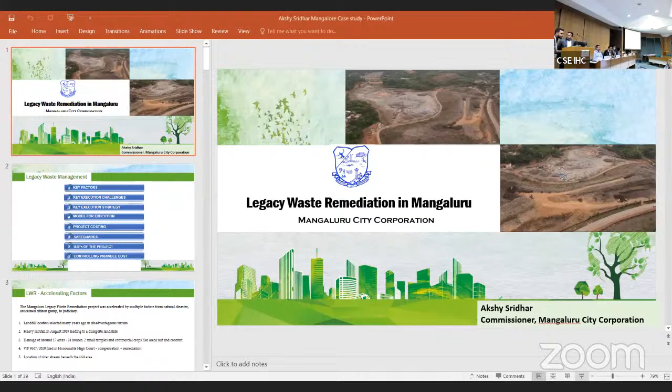Good afternoon to everyone gathered here and appearing virtually for this conference on dump site remediation and handling of legacy waste by Center for Science and Environment. I extend my sincere gratitude to CSE for inviting Mangalore City Corporation and giving me the opportunity to present Mangalore's case of handling this problem.

To give a brief introduction of Mangalore, especially in terms of terrain and weather, is pertinent before discussing the problem. Mangalore has a monsoon period ranging from 5 to 7 months a year, with a very slopey and hilly terrain. It's a place where the Western Ghats meet the Arabian Sea, so the city has hills on one side and sea on the other. There is an absolute scarcity of flat land; having flat land without undulations is only a dream for any Mangalorean.

The dump site or landfill location presently in Mangalore was selected probably 40-50 years ago. Over multiple years, this entire area of 25 acres was where waste was dumped. At the time of selection, the terrain put it in a disadvantageous location on a small hillock. As more waste kept coming, it kept moving inward, and one fine day in August 2019, the entire landfill collapsed, leading to submergence of 17 more acres, making the total landfill area 42 acres.

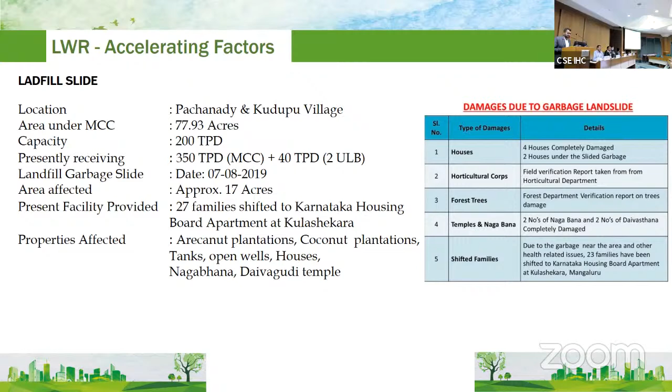So we were presented with this problem to handle all this legacy waste. Unfortunately, we did not have any model to rely upon, because wherever legacy waste had at least been partially cleared, the challenges were far lesser than what Mangalore was facing. With that as the backdrop, we had to factor in all of this and find a solution. One goal was to have a clean environment, and the main accelerating factor, I have to admit, was pressure mounting from the Honorable High Court and also NGT and other bodies.

Mangalore is also a very activist and active city, politically and socially. So we had to deal with that at the same time, and we needed a quick solution to handle this problem.

The entire terrain from the top of the landfill hill to the bottom was about 30 meters, with continuous undulation, and a river stream running just beneath it. Another problem was we did not have any spare land available inside the dump site area to set up infrastructure to bioremediate or process it. We had to find land inside this dump site only to handle this problem.

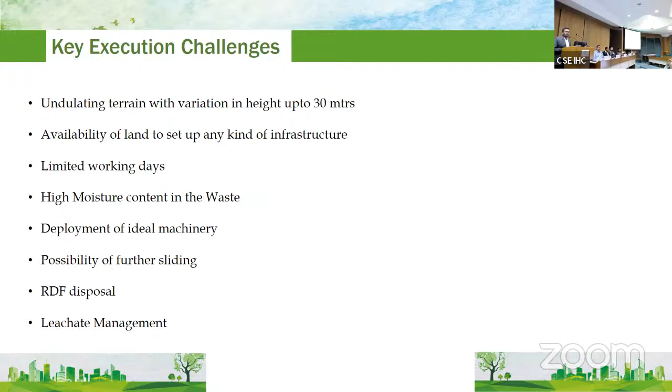Leachate management was another issue, because beyond polluting the underground water, it had the possibility of affecting the drinking water supplied to people.

So we decided to go with bioremediation or biomining, because given these circumstances, soil capping was never an option at all. We had to directly remove it. That remained the only option at hand, and we thought this was the only one that was going to work.

We also wanted to reclaim a lot of land through this, which could be further used for solid waste management operations in Mangalore, given the scarcity in other places. So we worked it out, thinking this would be the shortest possible tenure in which this project could actually get completed.

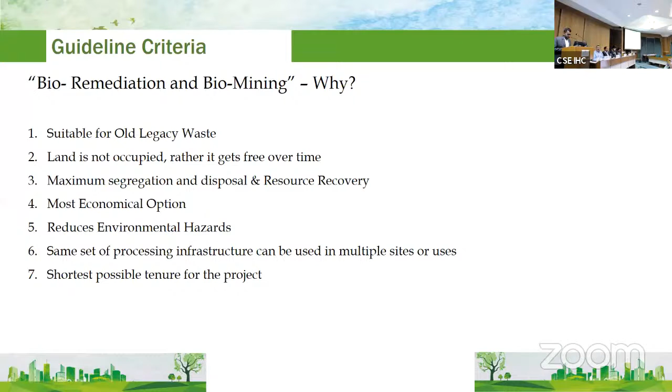While analyzing the possible cost of this project, we did a fair bit of cost-benefit analysis, and decided there could be 3 options on which the DPR could be designed: one, it could be completely outsourced; two, we could rent equipment and material handling vehicles and have MCC execute it on its own; or third, we could follow a hybrid model where controlled outsourcing can be used.

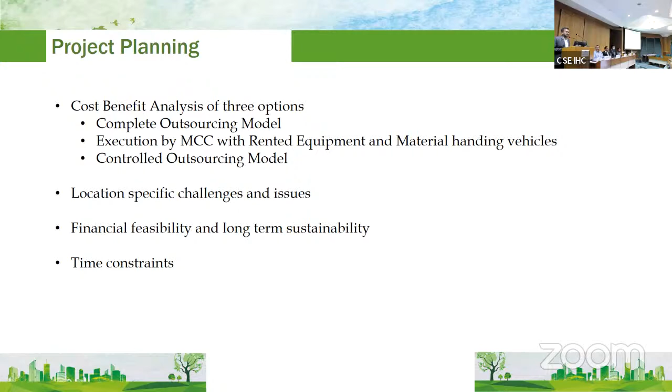Location-specific challenges all had to be factored in. We also thought of setting up the machinery and infrastructure in a nearby place where land was available, but the transport cost made that very unfeasible. So financial feasibility, and then sustaining it, were key concerns—we knew that at that point, to convince people and the courts, we could just start doing something, but sustaining it at that rate would be next to impossible. We also had time constraints, under severe pressure to get the land cleared, which was a major hindrance factor.

The total quantity of material to be processed, based on estimations from excavations and standardizations, came to about 9 lakh metric tons. We took a rough density of 0.8. The problem was that we were not able to exactly assess the density at every point.

Since the waste was sliding further, we were not able to fix one particular point or fix many particular points and assess how much density of waste will actually be there.

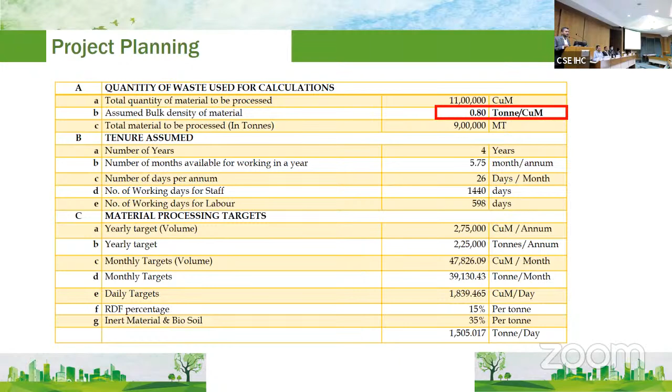We assumed a tenure of 4 years for the project, assuming we will get at least 5.75 months per annum, which will be literally less than 2 working years to actually consume all the 9 lakh metric tons of waste. So we fixed yearly targets, monthly targets, and worked them out based on prevailing guidelines. We thought the maximum that could be done for this climate, having 4 lines of machinery, will be about 1,500 tons processing per day, and even that will again amount to 2 years of time.

So this was the first model we considered: a complete outsourced model, the turnkey model, which will be handing over to one contractor for all construction, installation, and operation of the project. We'll have a tipping fee model where, based on the amount of waste that is biomined or bioremediated, we'll have to be paying the contractor. There is no need to consider the capital costs in such a model.

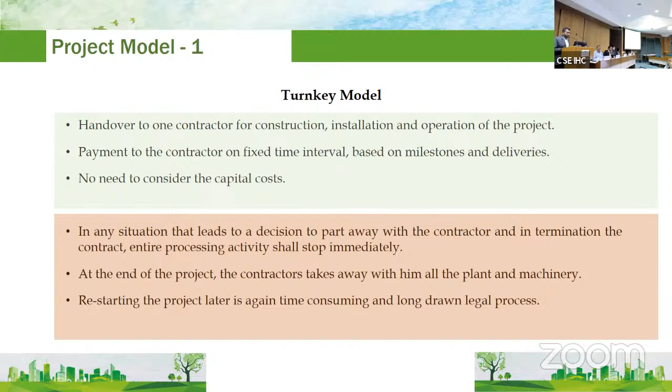But that put us at a huge amount of risk, because we also assessed that no contractor would have had the experience of working in such conditions. We have also had experiences in Mangalore where contractors held us to ransom because they held all the controlling factors, and MCC was always left in a position to negotiate with what they can give and what can be done. So we thought the first model might not work given the fluctuations in the terrain and conditions.

Then we thought to take all the equipment on rent and for MCC to operate on its own. This had its own set of plus points since we would have control over the project. But given the history of disputes we have had, we again voted down on this.

We also realized that renting the equipment was actually proving costly, because given a 50% idle time in a year, renting the equipment and just keeping it idle turned out to be more expensive than going ahead and buying it and making it a capital investment.

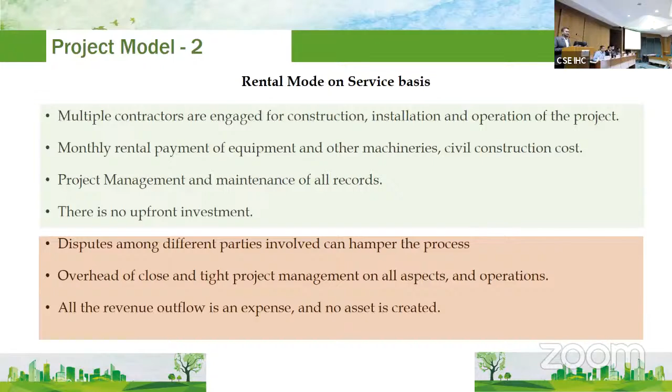So we came up with this hybrid model, where the contractor will supply the machinery to the corporation, the asset will be transferred in the name of the corporation, and the AMC will be done by the contractor who is supplying it. He will also be responsible for running it.

The advantage we thought we had in this over the first model was that even if we run into some dispute, or if the contractor runs away, or if disputes cause the project to get hampered, we'll have the machinery to work with, and we can always pull in different people, or have a second option where MCC can itself handle it. So we always thought we could get out of this in some way.

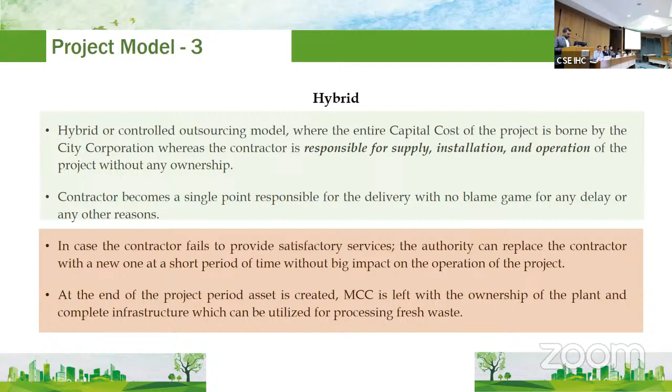So we went ahead with Model 3. Here we explain the modalities of how Model 3 actually works. The segregated material and everything will be taken care of by the contractor, and again a tipping fee comes in, but that will be minus the capital asset which is transferred in the name of the corporation.

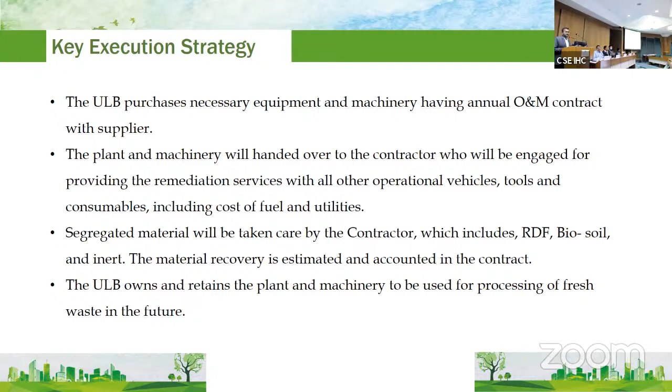So we evaluated the risks that would come into play. Without the cost of plant and machinery, the tipping charges were actually running lesser. Comparing it for 4 years to the costs in other cities which have done legacy waste processing, we thought actually buying the equipment would be much cheaper. So this was an advantage, and also we thought we'd have high quality control over the procurement, because having our own machinery means this problem could also be handled if it escalates beyond this 9 lakh metric tons, or runs beyond the estimated 4 years due to unforeseen issues.

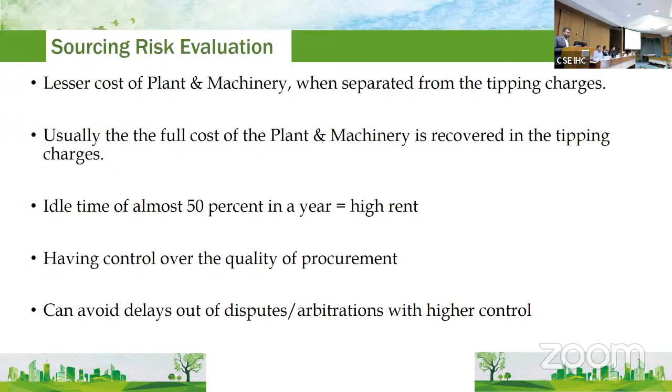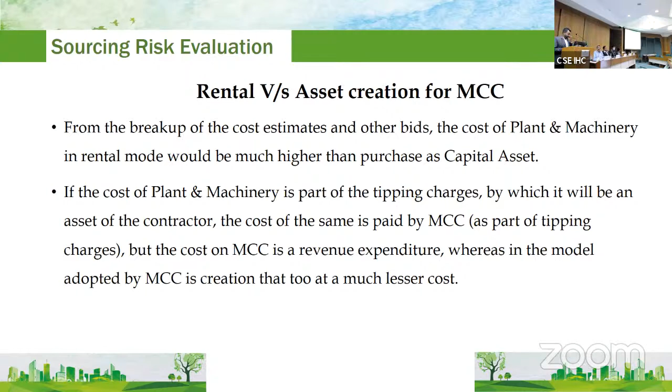So as we discussed, the rental mode was not an option at all, and MCC decided to go ahead with this. Again, while assessing how the cost could be controlled, we made two lists: one a list of variable costs which we can control, and other non-variable costs which have to be standard.

Since we have lesser working time, we thought this was very pertinent for our project. Whatever civil structure has to be constructed, whether it is going to be 2 years or 4 years or 6 years, it is going to be non-variable.

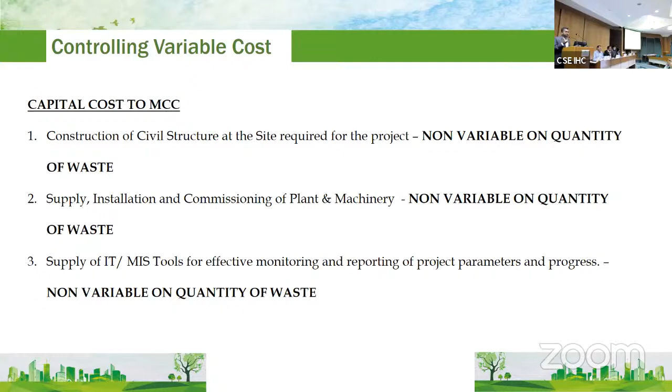Installation of the machinery was also always going to be non-variable, and same for supply of the IT tools required. A 5-year AMC was to be provided for these as well.

Since we decided on buying the machinery, whether the project would be completed in 6 months or take 6 years, we had the buffer of a 5-year AMC by the contractor who was legally obligated to do it. The only variable component was the day-to-day handling of the legacy waste, which might include the RDF disposal, the inert material, and also the labor charges.

For any additional equipment, we gave the contractor the liberty to deploy and use it as a variable cost, which the bidder could include in their bid. We also left the option of RDF disposal open.

Only the machineries were something we controlled, meaning the minimum number of machineries to be deployed. But other factors in the processing, including RDF disposal, we left open because we thought in that way we could realize lower costs if someone came up with an innovative idea.

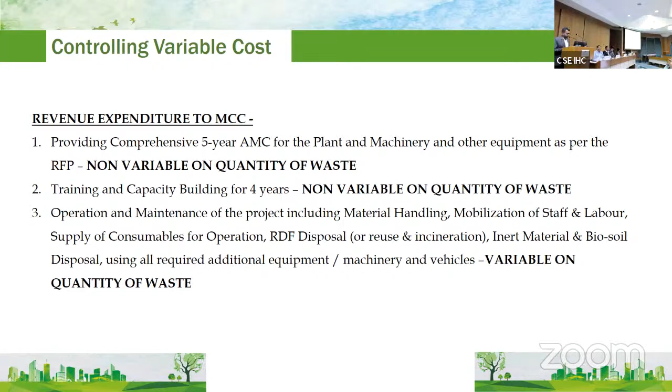We took more safeguards here too, thinking what if someone delivers only the machinery by quoting a lower cost and then runs away. So we decided we would pay only 50% of the machinery cost after delivery, and set up 3-4 milestones, with the contractor realizing the full cost of the machinery only after project completion.

We even had IoT-based tools, already available in the market, to completely track the project. We also had a positive incentive where if the contractor could deploy additional machinery and clear off the waste sooner than the estimated time, he could receive a positive monetary incentive.

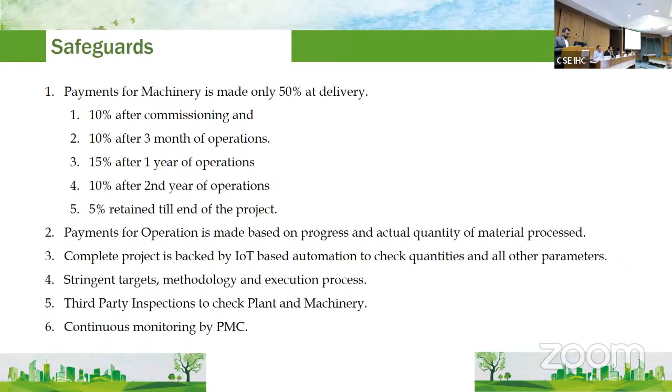So the AMC was again done in detail. We kept repeating the AMC or maintenance part because we realized it would take longer to clear due to fewer working days, so we thought keeping the machineries in ideal condition would be very necessary.

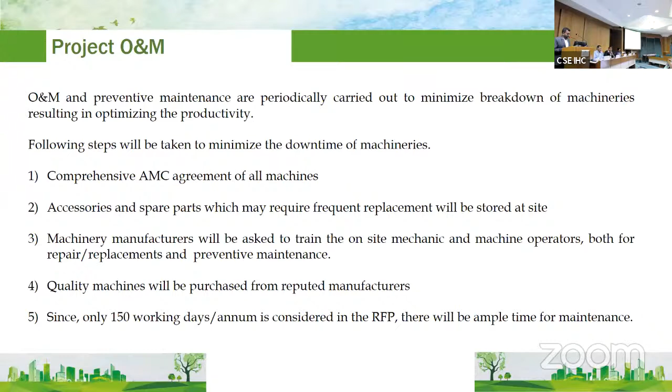These are the abstract of the costs that went into preparation of the DPR. Out of the total cost estimation, about 19 crores went into setting up the machinery and civil works, because due to the undulating terrain, a lot of civil work had to be done, including construction of sheds, leveling the land, and construction of concrete platforms.

That ate up a considerable amount of cost. The operation cost was figured out based on normative values, and it came to about 73 crores in total.

In the process of tendering, we decided to give a little leeway. We thought even if 3% of the material could be recycled, we would reduce that from the project cost and let the contractor have all of it to recycle.

We gave enough time for the participating bidders to assess the site. If they thought that a certain quantity could not be recycled or could not be taken out, they had the option of quoting a higher cost, saying no recyclables could be given.

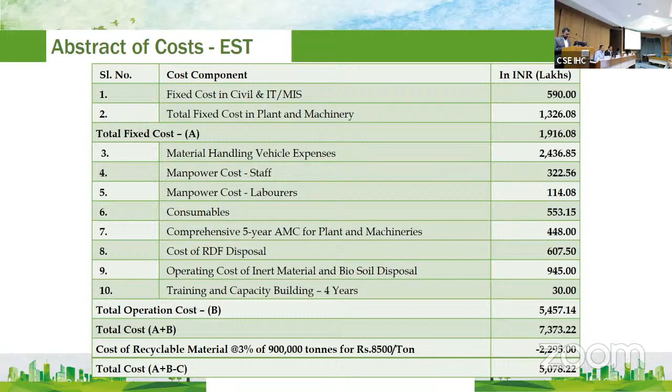Finally, the contract was awarded to NACOF, and these were the final costs realized: about 626 rupees per ton, including installation of machineries, and operating cost was quoted at around 413 rupees per ton.

Since we had factored in and bought the machines ourselves, the operating costs were only 400 rupees per metric ton, which was definitely the cheapest in Karnataka. From a brief overlook of various projects across the country, we realized these were even lower rates given the conditions we were actually facing.

The contractor used the rope we gave him to dispose of RDF. Sending RDF to a cement plant was kept only as his plan B; plan A, he proposed to innovate with pyrolysis. As the Honorable Joint Secretary mentioned in the morning regarding reverse pitching, they said they have a technology where they can use pyrolysis and will try to implement it.

That risk is entirely on the contractor. They've started the civil works for setting up a pyrolysis plant and have shown a demo of the same in Tamil Nadu. We are waiting to see how this will work, and if it works, it will definitely lead to a lot of cost cutting.

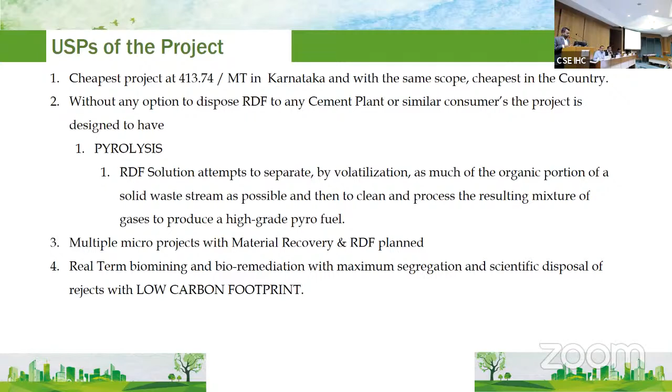So this is a rough sketch of the map of the legacy site. We basically divided the landfill site into various sectors, 4 sectors.

This division depends upon the quantity and quality of the waste available. Sector 3 in the map is where the waste is even fresher, and likewise as it goes down, more solid waste has been consumed, and it will be more or less of inert nature.

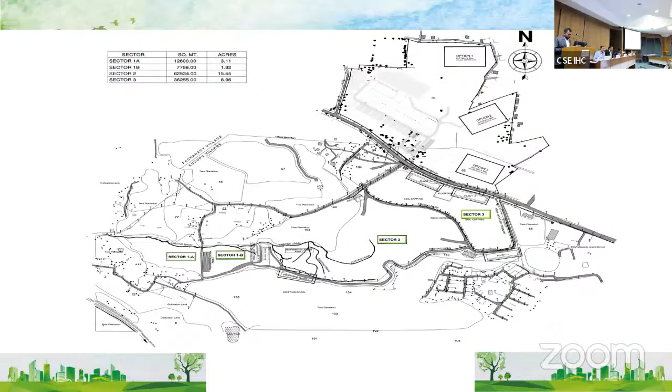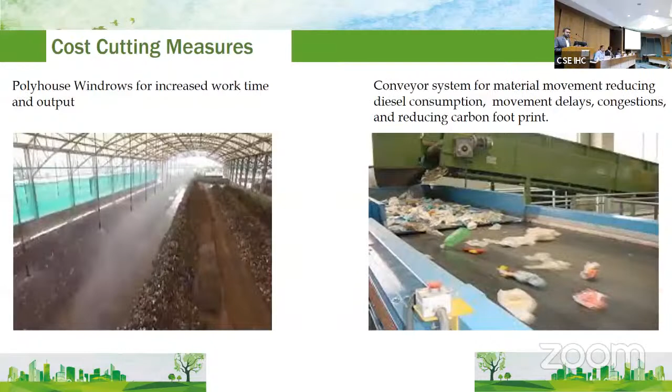So again, the work has started, and instead of civil machinery, they have set up polyhouse windrows so that increased work time and output can be achieved, and a conveyor system has been installed. So this is the present status of the project.

Since the project was awarded in April, in the last 5-6 months, because of heavy rain, we have not been able to start the biomining as such, but the preliminary works have begun in full swing. We can also say that this is the first year since the collapse where we have not had any leachate runoff to the river stream, because leachate management, made the responsibility of the contractor, has been handled well by setting up aerators and creating leachate ponds.

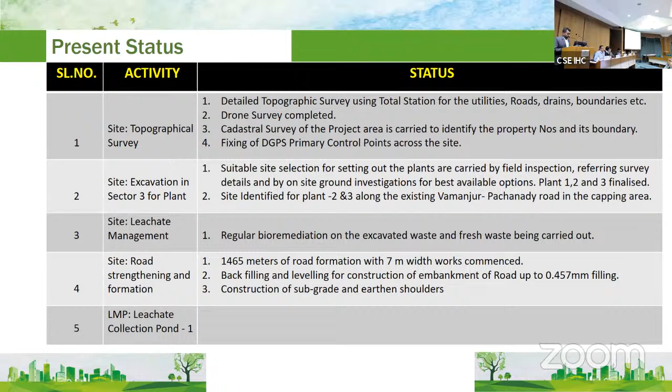So some pictures from the works that are going on.

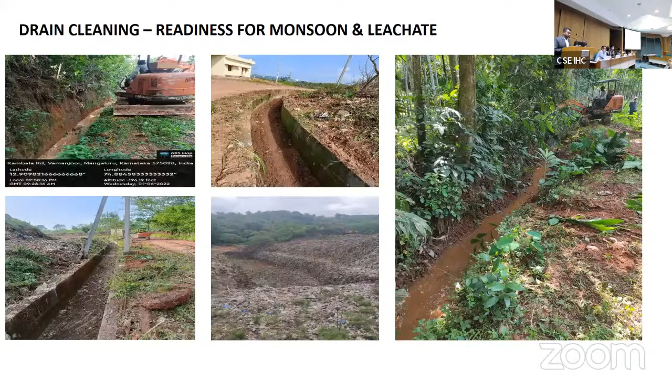Again, we have to come up with making a lot of drains to make the leachate less of a trouble.

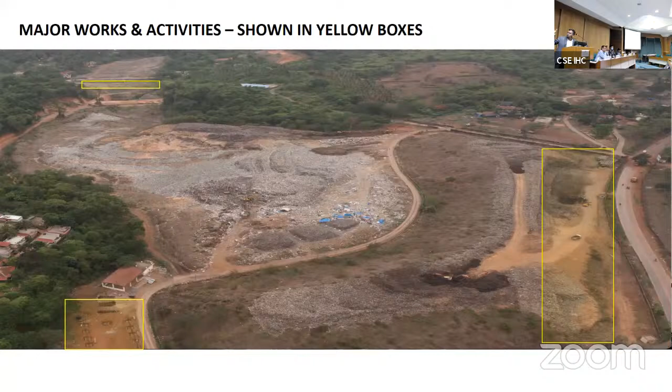These areas marked in yellow are where the plants are bound to be set up. In fact, the one on the extreme right is where the old capped waste was present, but that turned out to be the only suitable place for installing machinery, as it was relatively flatter. So we had to excavate the old waste and relocate it so the land could be used for setting up new machinery.

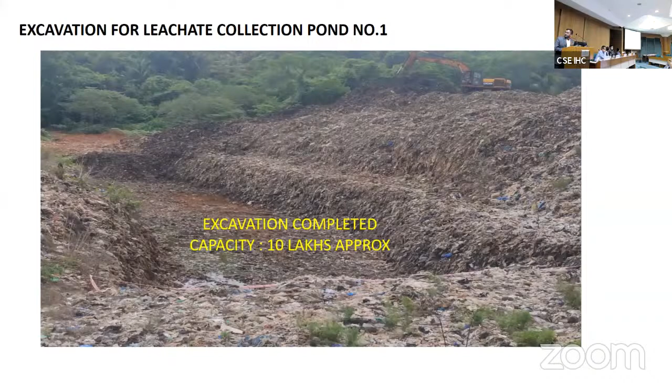Again, this same point - excavation has been completed where the machinery is planned to be set up. And this is for the leachate collection pond where excavation has been done and a pond has been created, working so far with a geomembrane liner and HDPE pipes.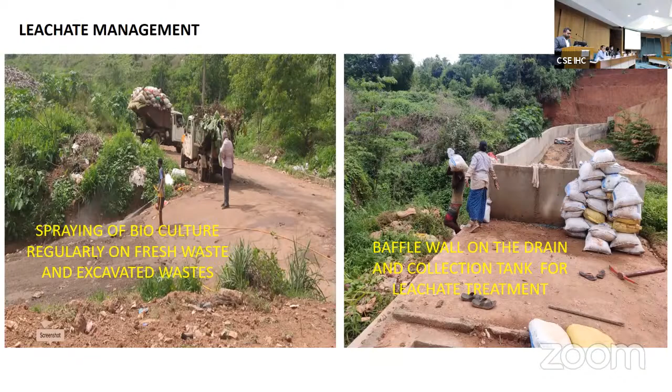Again, we have been spraying bioculture regularly so that waste could be compressed and waste quantity could be reduced. Some more pictures. To be frank, the preliminary work has started in full swing.

So we'll know what we have explored or ventured into only in another probably 6 months' time, when the actual biomining work will start. But so far the works have been very, very satisfactory. If this can be realized full time, we believe this will actually change the costing game that is so far prevalent in handling of legacy waste. Thank you.

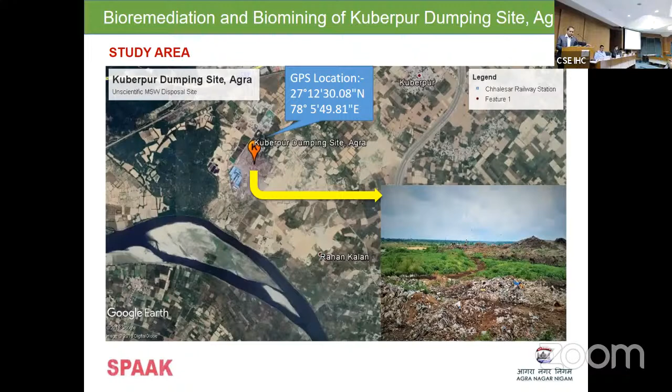So this is our Kuberpur dumping site. It sprawls over an area of 42 acres. It's very close to the Yamuna River, so it could be a potential source of contamination if you don't treat the legacy waste, the fresh waste, or any waste through a scientific manner.

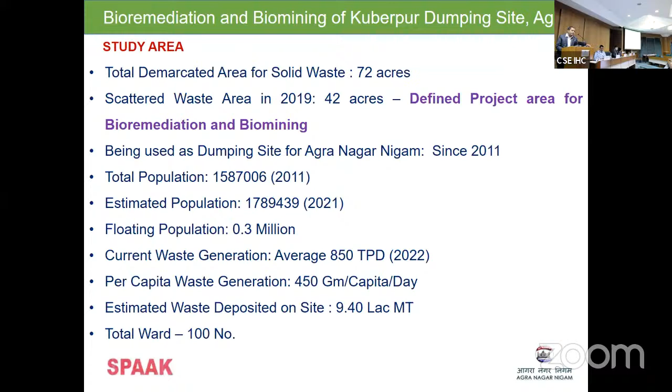If you see the entire scenario of the study area, out of 72 acres, 42 acres of land was full of legacy mixed, unprocessed waste. So the defined project site area for our project was 42 acres. It has been used since 2011. The total population is right now approximately 20 lakhs, because Agra is one of the tourist cities, an international city, so floating population contributes a major portion. Current waste generation is 850 TPD, per capita generation estimated about 450, and the total waste quantified was 9.4 lakh metric tons.

Till date, out of 42 acres, we have reclaimed 37 acres, because in 5 acres of land there is an SLF area. So the base level, what was basically contracted through our contract, we could not achieve. So we cannot say that we have reclaimed the full 42 acres of land.

We have reclaimed only 37 acres of land, but definitely we have executed the 9.4 lakh metric ton of legacy waste. If you see the total 9.4 lakh, it's maybe 15%, maybe 20%, but the average was 18%.

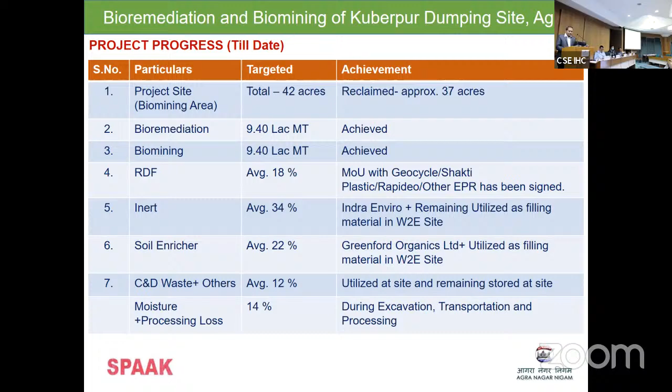It constitutes RDF 18%, inert 34%, soil enricher 22%, C&D and others. C&D and others means like any wooden material, if big materials come, we consider it in others, so 12%. Moisture loss and processing loss occur because if you are transporting stabilized waste from the windrow side to the trommel side or segregation part, there will be some loss. We have considered it, and it's about 14%.

If you see the entire area, the green one, we have cleared it - about 37 acres. The A part is basically allocated for the waste to energy, 15 megawatt waste to energy, about 11.25 acres. B is basically for the C&D waste plant, 150 TPD proposed. D is the 300 TPD compost plant. E was the total biomining area, in which we have cleared 37 acres.

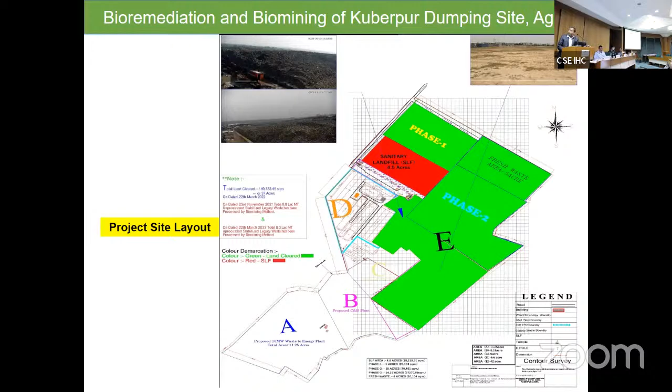And there is a small portion of land on the right hand side, basically 5 acres of land. It is basically demarcated for the fresh waste site. You could see the pictures of the dumping site also.

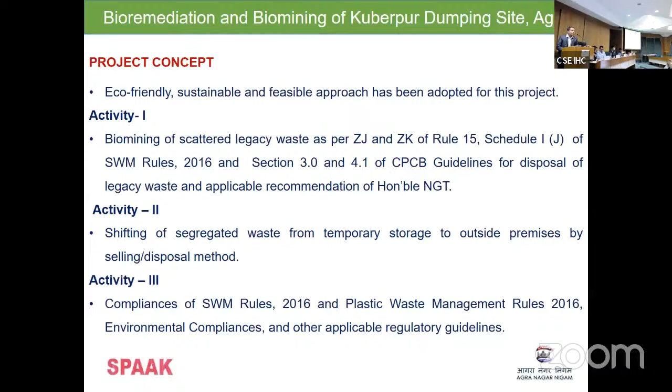If you see the entire legacy waste treatment, the entire activity could be bifurcated into 3 parts. The first one is related to biomining following the SWM rules. The second one is related to processing the waste - definitely the byproducts and temporary storage of byproducts is one of the activities. The third one is that whatever things you are doing should be aligned to applicable SWM rules, CPCB guidelines, and honorable NGT guidelines. So these 3 activities have been followed in the entire project.

Following the CPCB guidelines, the activities were broadly divided into 2 parts. One is windrow formation - this could be called bioremediation. The second one is segregation through the trommel - this is basically the biomining.

If you see the bioremediation process, it involves addition of inoculum and turning. We add inoculum because we understand that the legacy waste site, when we took handover, was basically active. So it receives fresh waste also, and there is a lot of organic fraction of MSW. So first we have to degrade it, and after that degradation, we have to segregate it.

So we add an inoculum, we turn it, we basically do sun drying, and after a good portion of moisture loss, we do the segregation through the trommel. We use 3 sizes of trommel: 125 mm, 35 mm, and 6 mm.

Once we use the 3 trommels, 4 byproducts are released. One is greater than 125mm, which constitutes mainly RDF material, large objects, and CND waste material. 35mm mainly gives single-use plastics and cloths. 6mm gives small aggregates and sand. The -6mm we call bio-earth - it contains basically drain silt and night soils. These all constitute the -6mm fraction.

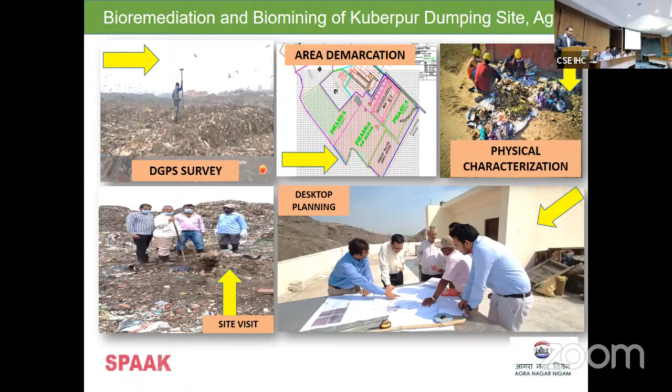Accordingly, we completed our site visit with the client, and planned one fresh waste area, because the site is active, so we should think about fresh waste storage for the period of concession time. So we demarcated 5 acres of separate area for the fresh waste, and we created some infrastructure development for green development.

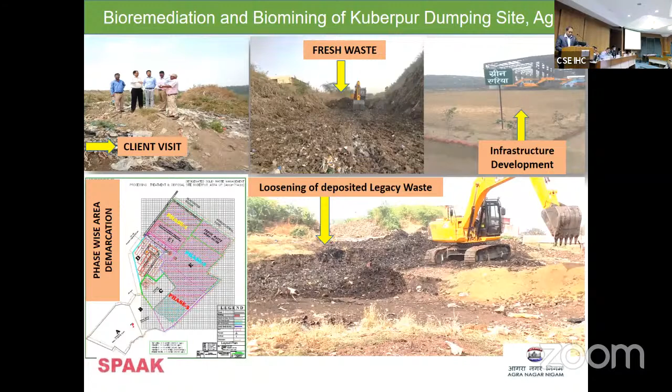Then we do the loosening of waste and excavation. If you see the entire picture, this is basically the flow sheet. First we loosen the waste, then we prepare the windrow, because as per CPCB guidelines there are 5 different methods for bioremediation. We adopted the windrow method considering the availability of area as well as the quantity of waste.

Because if we adopt another method, it will not meet our requirement. So after formation of the windrow, we added the inoculum. Then we turn the waste and try to stabilize it. Whether the waste is stabilized or not, we check through the seed germination method as per CPCB guidelines. Once it gets stabilized, it is transported to the different machinery for trommeling or segregation.

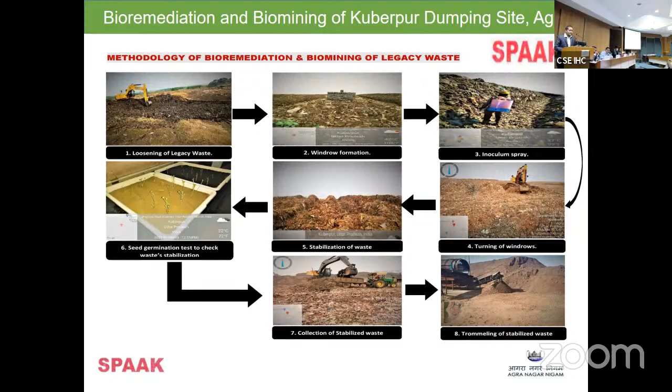The entire process explains the same thing. 6 sets of trommel were installed at the site, all with different sizes: 20 TPH, 30 TPH, 45 TPH.

There was one 20 into 2. It means the feeding is through one system, and after feeding, it bifurcates into 2 different sets. So that's why 20 into 2, making 40 TPH.

If you see, all 6 trommels were not installed in one day. First we installed a small one, 20 TPH. Then we learned about site selection criteria, the need for machinery, and ancillary facilities required like electricity. Then this helped us in the installation of 30 TPH, 45 TPH and other machines.

We used 4 poclains for windrow formation and JCBs for feeding. When we took the site, it was not plain, it was an undulating surface. It was not a scientific or engineered site. So if you are going to prepare a windrow, the space and area should be plain, so it will give you a better, more efficient result.

That's why we hired a dozer, and tippers for transportation of waste. We used tractors because if you see the dumping sites where 10 lakh tons of waste is accumulated, you cannot run any vehicle at speeds of 30 or 40 kilometers per hour. You have to select the vehicle based on the topography of the site, the quantity of waste, the area of the waste, and the characteristics of the waste.

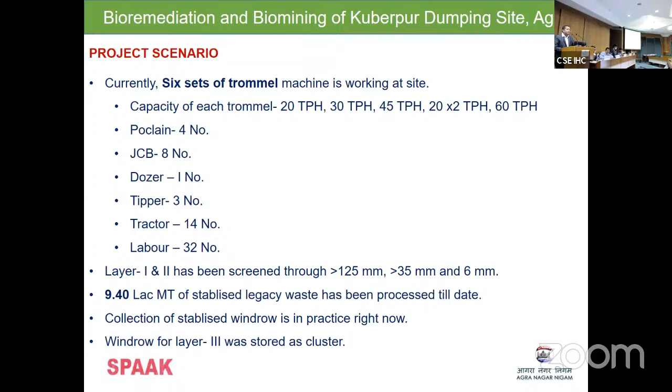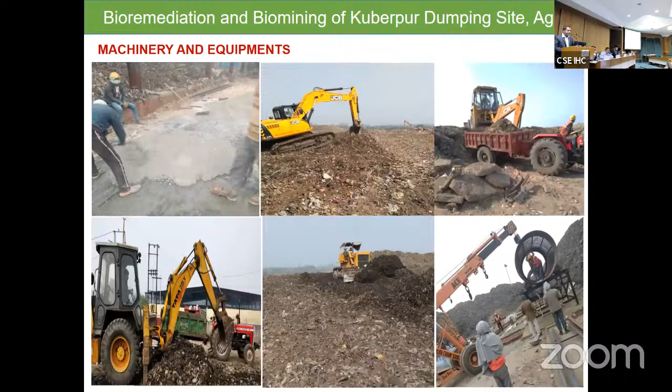This is our machinery system we engaged: poclain, JCB, and tractors. This shows how we executed our project from the commencement of work to completion of the project.

This is our trommel. If you see the trommel, first we handle the large objects, which are hand-picked. Then 125, 35, and 6 mm. If you see our first trommel, we used a vibratory screen instead of the 6 mm trommel, but it was not successful.

We also used the ballistic separator, but it was not successful. The O&M cost was very high, and once the machine chokes, it takes 2 or 3 days to resume, so our work was hampered. So the most easy, economical and viable technology is the trommel.

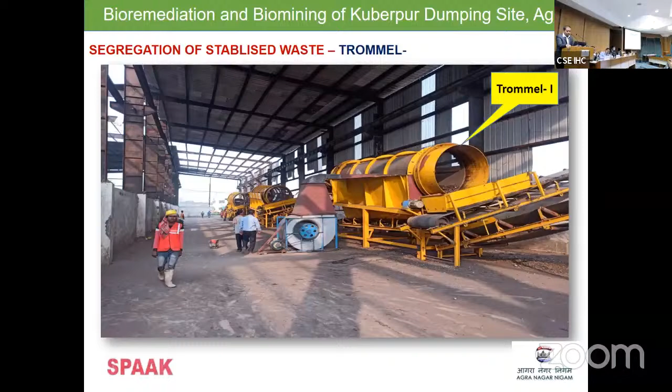We modified it a bit according to the waste. We used an air separator so that moisture content would be reduced, and also so that plastic content would be separated. We used the air separator on the 6 mm trommel, and finally we got 4 byproducts: 125 mm, 6 mm plus 35 mm, and minus 6 mm.

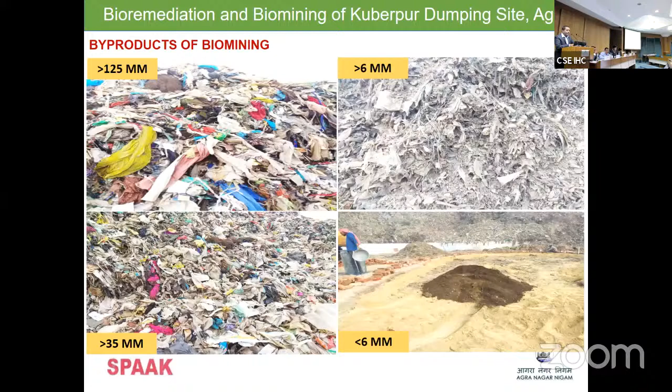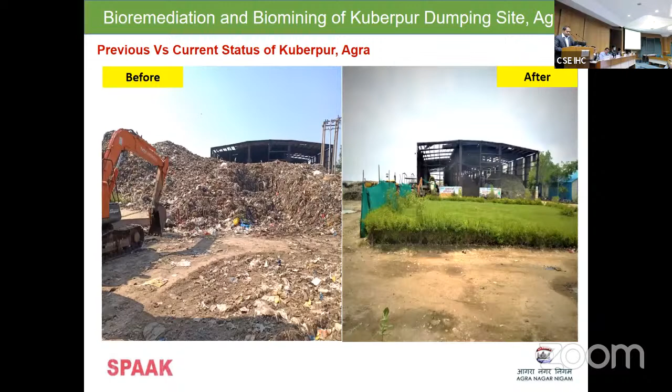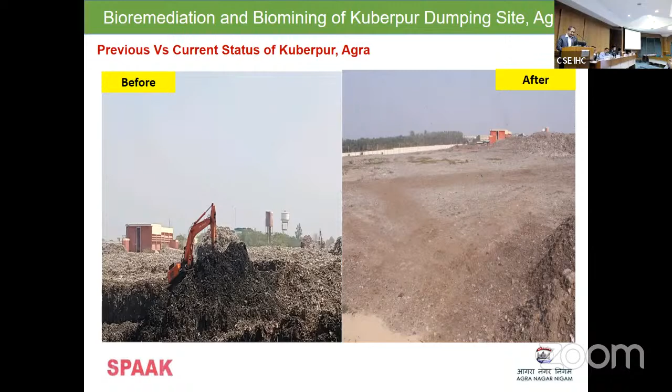This is basically the after picture, is SLF. This was the site before. This was basically in front of the admin building.

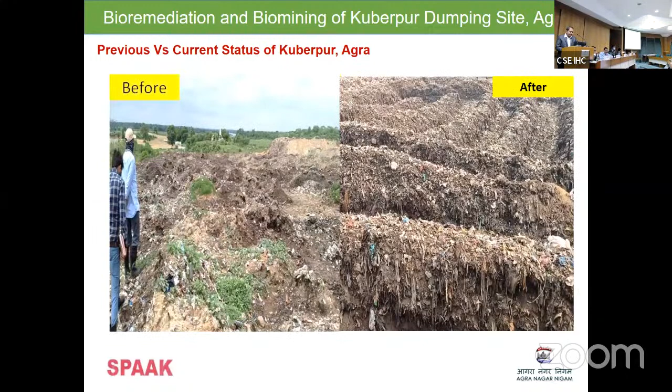These all are the before and after pictures of the project sites.

The most important thing is byproduct management. We have analyzed our sample of byproducts from the Sri Ram lab. Definitely, as the Zigma person was telling, there are no heavy metals, but we found heavy metals - cadmium, zinc, and nickel. It's very obvious that in waste management, cadmium is the very common heavy metal found in all waste samples. So in the BioEarth, when it is being sold by us, we have not recommended it to any farmers. We are just using it. We are not adding it to the food chain. We are adding it for horticulture purposes, for filling materials, but we are avoiding adding it to food cultures.

For Geocycle, we have a tie-up for RDF, but the nearest cement plant from Agra to Kanpur is about 600 kilometers away, so it's not economical. We have signed the agreement, but only 40 or 50 trucks have been transported from Agra. C&D waste is being utilized at the site.

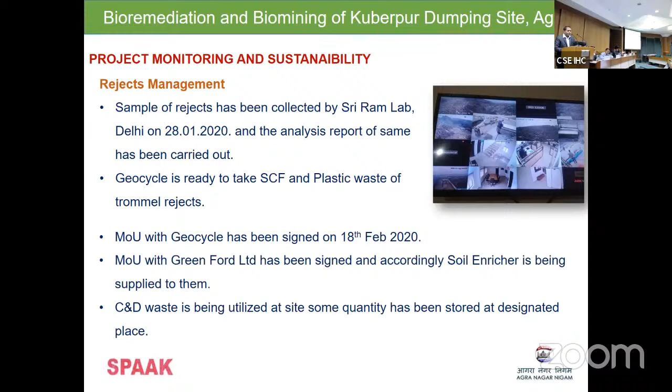Challenges we faced: when we started our project, the major challenge was identification of a suitable site, because this entire site was full of legacy waste. So it was a challenge to find good earth for establishment of the machine - identification of a suitable site for erection of the machine, and electricity connection, because most sites don't have any electricity, so we faced that problem. Odour and infrastructure development was also a challenge, because once you enter any dumping site, odour is one of the challenges.

Social and material security is also a challenge, because we have a motor and some MS sheet, so material security is one of the challenges. Heterogeneity of the legacy waste, both spatial and vertical - on different strata the waste was different. Spatially, the 42 acres of land was full of legacy waste, so it was very heterogeneous in character.

Dust control was a challenge because Agra has temperatures of 45-47 degrees. Dust was one of the challenges because we have a site of 42 acres, and a slight wind speed could erode the soil and become a potential source of dust pollution.

Sale of RDF and plus 6mm material to authorized vendors - we can sell to nearby people, but if not to an authorized vendor we have to maintain records of whom we sold to. If someone takes plus 6 material from the site and disposes it in a nearby pond or river area, it could be a problem. That's why we always send our byproducts to authorized vendors.

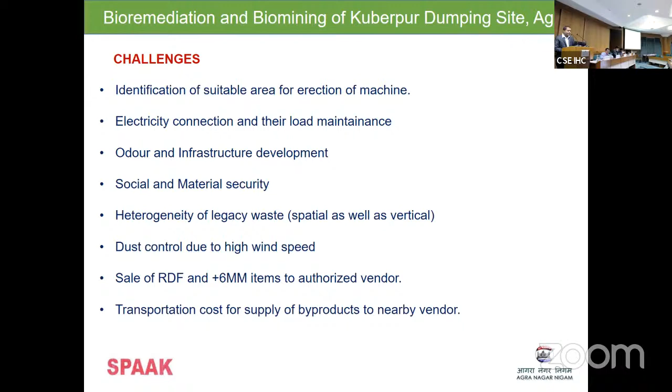Transportation cost for supply of the byproduct to a nearby vendor is also a challenge, because the RDF is a light fraction, so the transportation option is not economically viable. During the rainy seasons, we have also managed our leachate.

In the leachate management plan, we identified the topography and potential areas, understood the drainage pattern of the site, and accordingly selected 2 or 3 different sites within the 42 acres. We created small channels by digging them, added inoculum, stirred it for aeration, and finally managed it following CPCB guidelines.

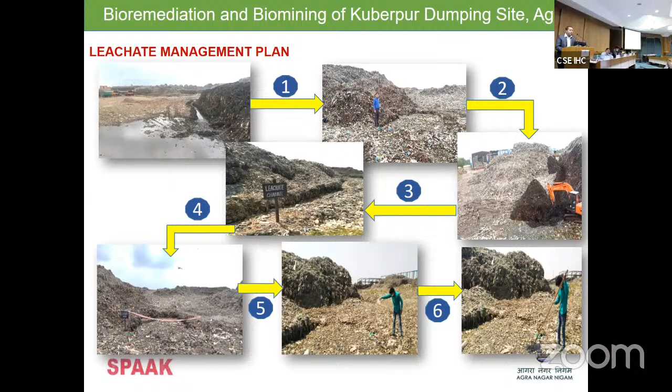Considering the environmental management plan, we all know that NGT is very active in Agra, so whenever we do any planning, we should consider the environment as a component. Movement of vehicles was on a fixed route only, idle movement was strictly prohibited, and we identified hot spots, as I told you the area is 42 acres with temperatures of 45 degrees centigrade.

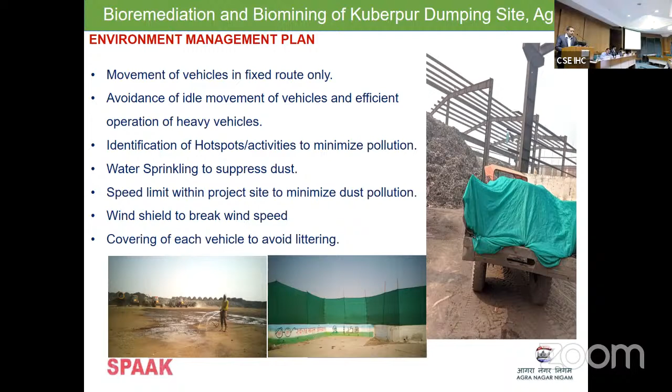We identified some areas as our hot spots. We used green sheets to divert wind speed and direction to minimize air pollution, and water sprinkling to suppress dust. We created small barriers within the site for speed limits, and covered each vehicle to avoid littering.

General EHS practices were adopted as per our company guidelines. PPE models - PPE has been given to all employees. Movement of vehicles was confined to a specific area, and ancillary activities were carried out on an impermeable level.

We could have taken land from Agra Nagar Nigam apart from the 42 acres, but we did not, because for windrow formation or other activities, taking more land would definitely get contaminated. So our area was limited to only 42 acres. Such planning and execution plan factors were considered, and accordingly the project has been executed.

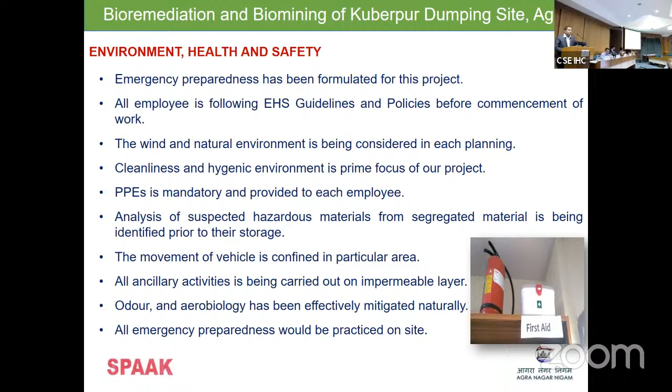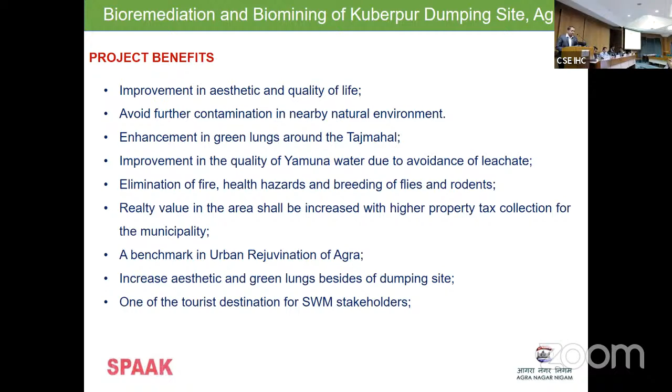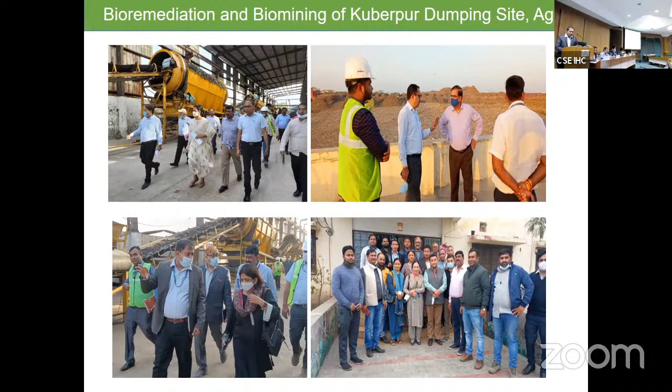These are some pictures. Rupa Misra madam has visited, CPCB and NITI Aayog people have visited, and people from Leh have also visited, along with different ULB representatives. The Chief Secretary and an NGT member have also visited our site. This is all about our experience.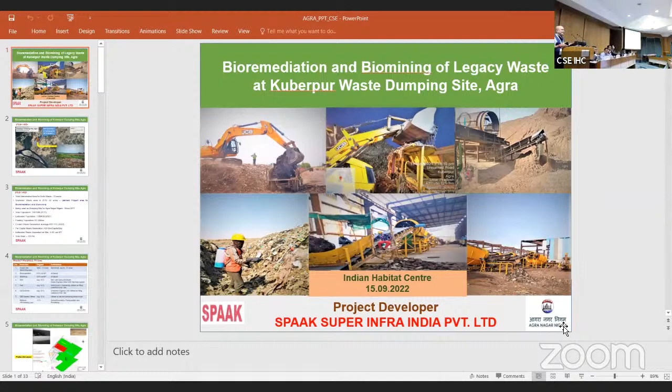Actually, our 15 megawatt waste to energy plant is being implemented. It's under execution—boundary wall and civil work have already started. I think in the upcoming 2 years we'll execute the project. So we have stored it; this RDF is being stored for that project.

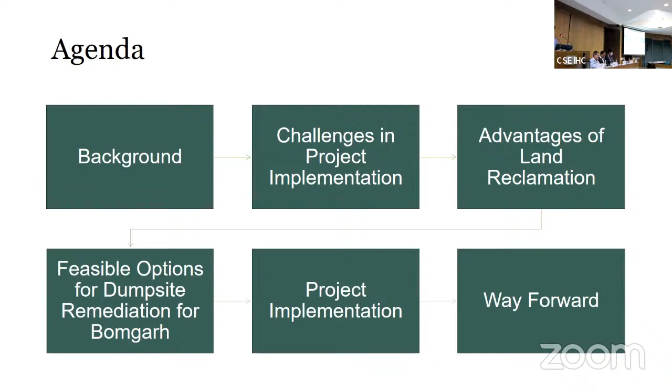Good afternoon, everyone. On behalf of the Directorate of Urban Local Bodies, UT of Ladakh, I will be giving a presentation on dump site remediation and legacy waste management in UT of Leh. We'll discuss the background first, the challenges faced in project implementation, advantages of land reclamation, feasibility options considered for the project, the project implementation itself, and the way forward.

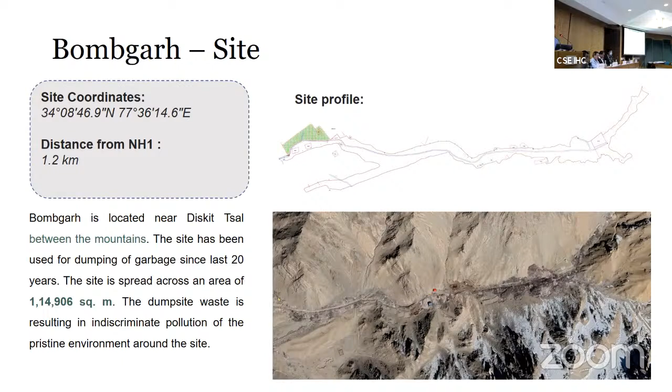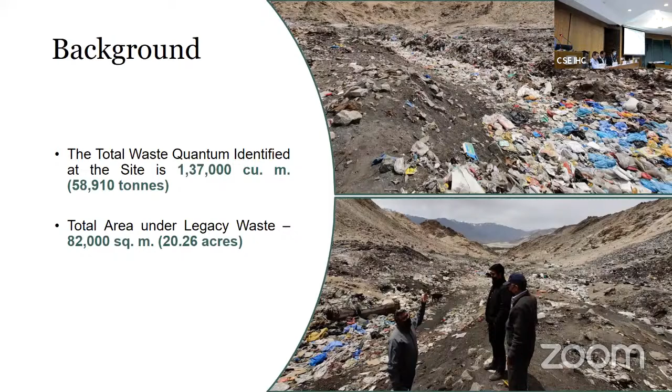Our dump site was situated at Bombgarh, located between the mountains, with an area of about 1,15,000 square meters. The dump site had been in use for the last 20 years. Leh established a municipal solid waste management plant back in 2020, so no fresh waste was received at this site afterward. The total quantum of waste identified at the site was 1,37,000 cubic meters, determined by the total station method. The area under legacy waste was 82,000 square meters, and we had planned to recover this entire area.

The challenges we faced in Leh: first, the local topography itself is a challenge given the harsh climatic conditions and limited working time. Also, acclimatization in itself is a big challenge for anyone visiting Leh. Then there's higher service cost, since local manpower is hardly available and transportation of manpower and machinery is quite costly. We also have very limited technology options due to the harsh weather, with temperatures down to -27 degrees Celsius in winter, leaving very few technology options available.

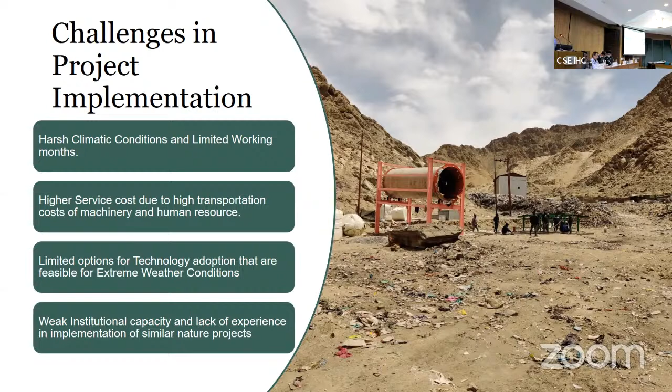The last challenge we faced was weak institutional capacity. Since the formation of the UT from the erstwhile state of Jammu and Kashmir, the ULBs did not have technical manpower well versed in execution of these kinds of projects.

These were the three technology options considered for the project implementation. The first was shifting the waste to the new sanitary landfill facility. That would have required an area of 32,400 square meters and financial implication of 19.5 crores. Since going forward with this option would have rendered the land unusable and cost a lot more money, this option was discarded.

The next one was biocapping. Biocapping in itself is almost like a landfill. You do not get to use the land for 10 to 15 years, and you have to monitor the leachate and other things, for which the ULBs did not have the institutional capacity. Then the last option explored was biomining.

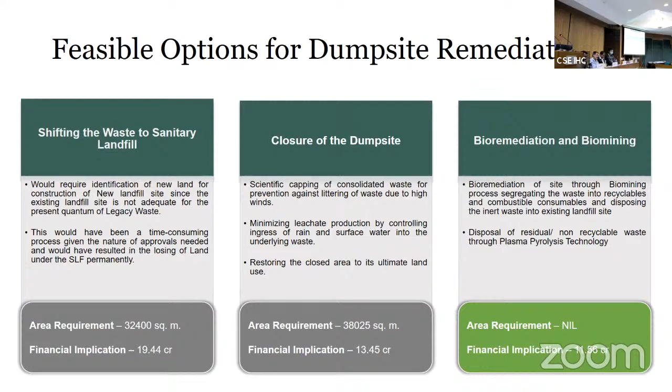The area requirement was not much because all machineries can be installed within the dump site itself, and the financial implications were near 11.5 crores. So this option was opted for.

Now I would like to tell the advantages of land reclamation. Firstly, it saves the cost of land instead of buying another one. It results in recovery of land where new and potential projects can be planned. There's revenue generation from recycling of RDF and other materials, and the landfill soil can be used for other landfill works upon testing. It also avoids costs related to post-closure monitoring.

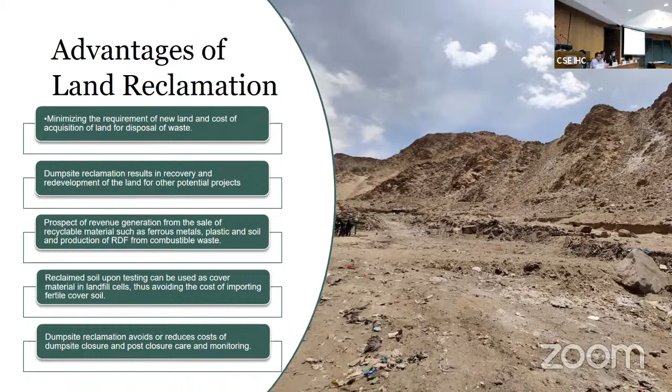The dump site was divided into multiple zones through which a waste characterization survey was conducted, which yielded the following results: the density of our legacy waste had come down to 0.43 tons per cubic meter, and we did not encounter organic waste in that.

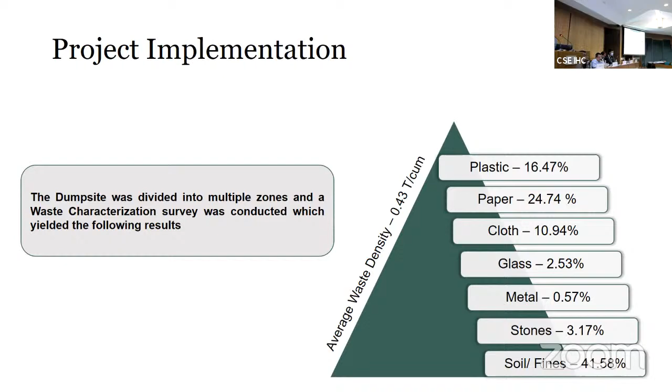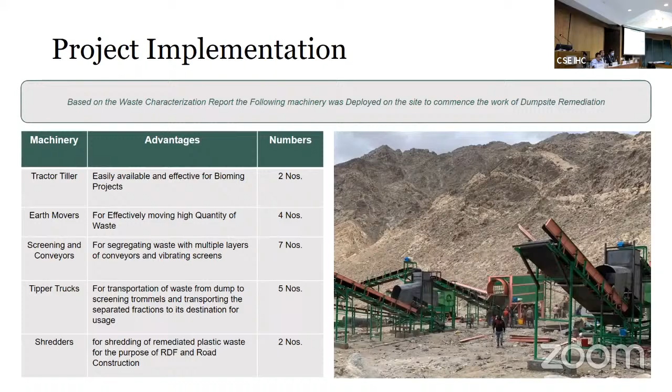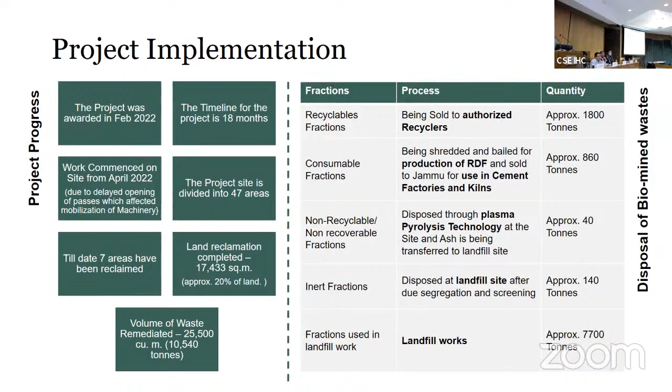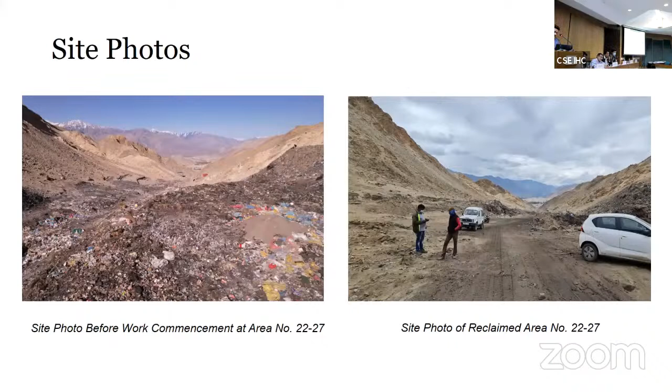These are some more site photos.

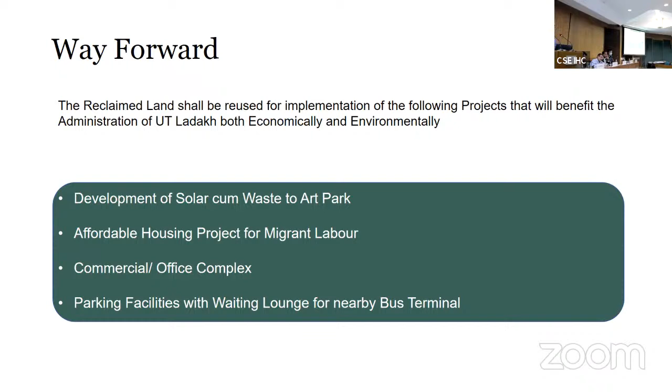That will be all from my side. Thank you.